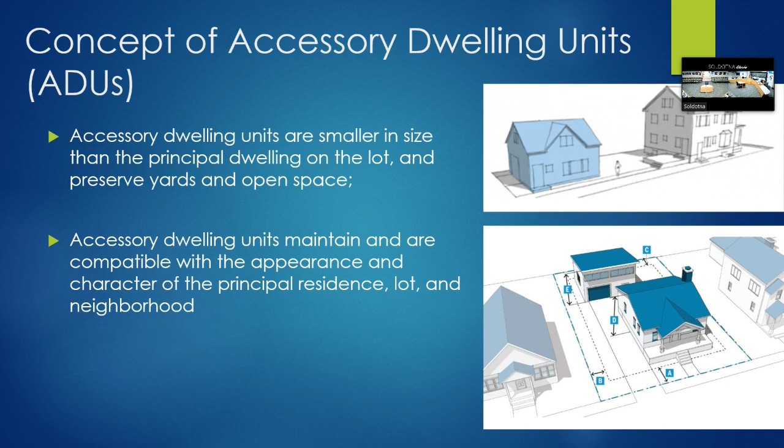Purpose and intent. These are the basic reasons why we think we should be allowing ADUs in Soldotna. The first one is that it allows more efficient use of our existing residential zone land, our housing stock, our existing infrastructure. If we can hook another unit into our already existing sewer and water, that's a plus for everybody. It allows us to respond to changing family and community demographics.

So if we've got parents that want to age at home, we can provide a space for that. We can provide a space for our kids. We can provide a space for the single person that moves up to Alaska that's never been here before, and they've got their place of their own rather than perhaps an apartment. It provides a broader range of accessible and more affordable housing within the city. So hopefully this will increase the...

Can you check, Jen? Someone's at the front, thanks. I thought her—okay, oh, it's okay, thank you. Post office delivering late.

So we talked about affordability a little bit, and then last, protect neighborhood stability, property values, single-family residential appearance. So those are the reasons that a lot of folks are adopting these codes and the intent behind them.

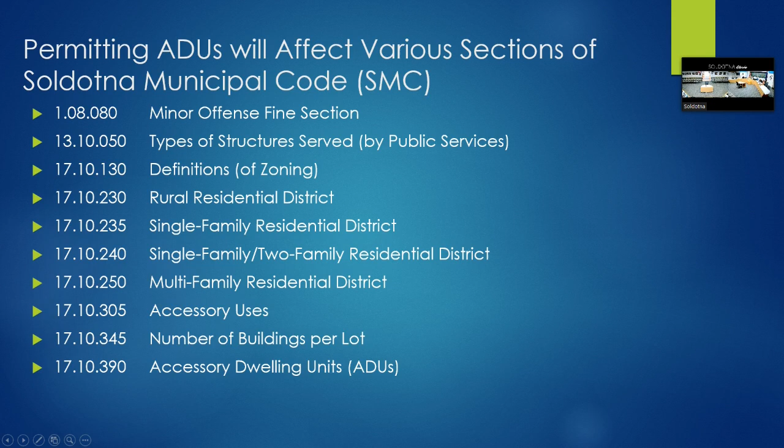So the definition—what is an accessory dwelling unit? It's a subordinate detached dwelling unit which provides basic requirements for living, sleeping, cooking, and sanitation, added to a lot or parcel with an existing residence.

We'll get to that here in just a little bit, but generally duplexes are allowed in most residential zoning districts in the city. There's only one, the single family zoning district, where duplexes are not allowed. What about if they converted their garage? If the garage was attached, it would be considered a duplex. If it was detached, we would consider it an accessory dwelling unit.

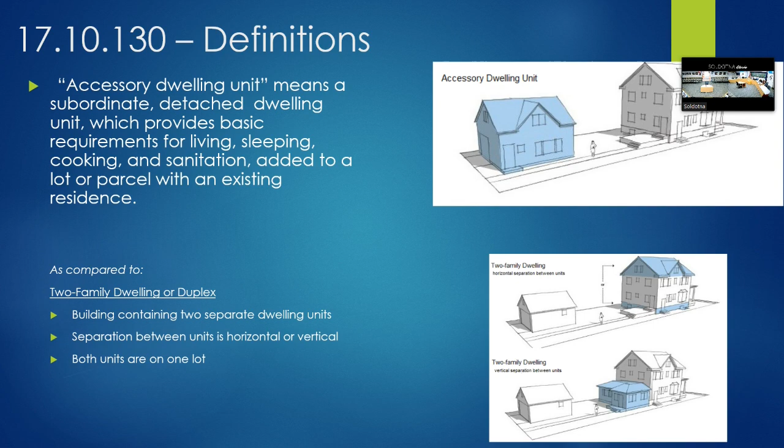So we'll start with the single-family residential district. As Jen pointed out on the map, the single-family residential district is tiny. It's the smallest zoning district in the city, and it only affects about 15, maybe 20 parcels.

The rest of the city is zoned, for residential anyway, as single-family, two-family, rural residential, or multifamily residential.

What I've left out is A, B, and C, which are the principally permitted uses and the conditional uses, and one other section, general standards. So we're only talking now about the accessory uses and structures section.

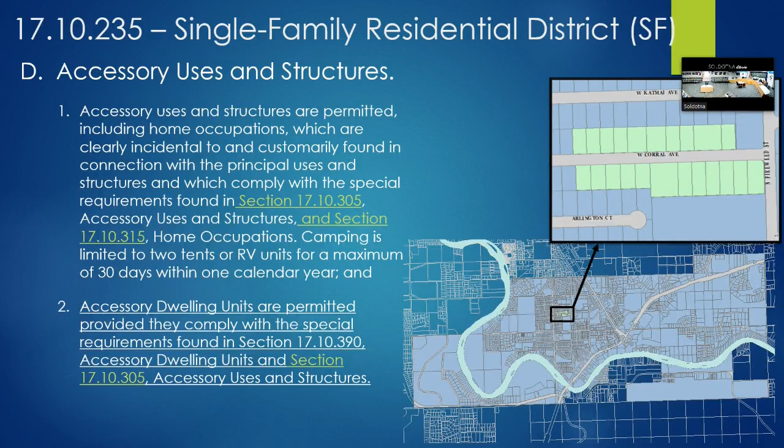It's saying accessory dwelling units are permitted provided they comply with the new section 390. The other thing I'll point out here, in both the single-family and single-family, two-family districts, is this right here: camping is limited.

Camping is limited to 2 tents or RV units, not to exceed 30 days. I call that to your attention because we're going to come to one district here that does not have that, and that is one of our suggested changes - to add that in.

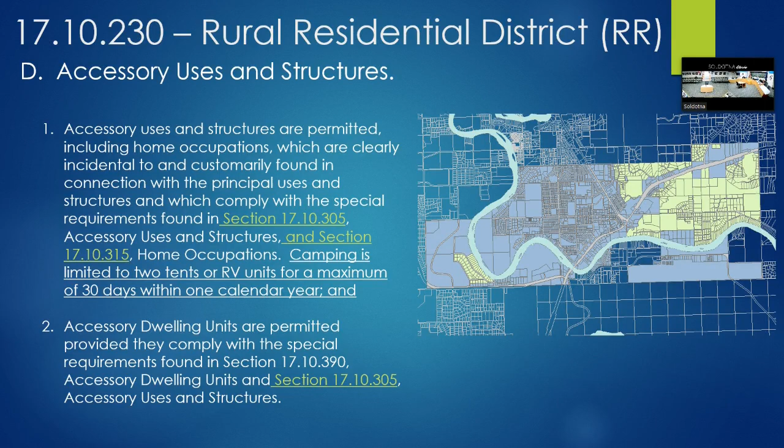You can collect rent if you want to. It's basically taking out an old section of code that, as far as we know, has never been utilized.

We have in our general standards height standards for all buildings in the zoning district, so we feel this additional language in the accessory use section isn't necessary.

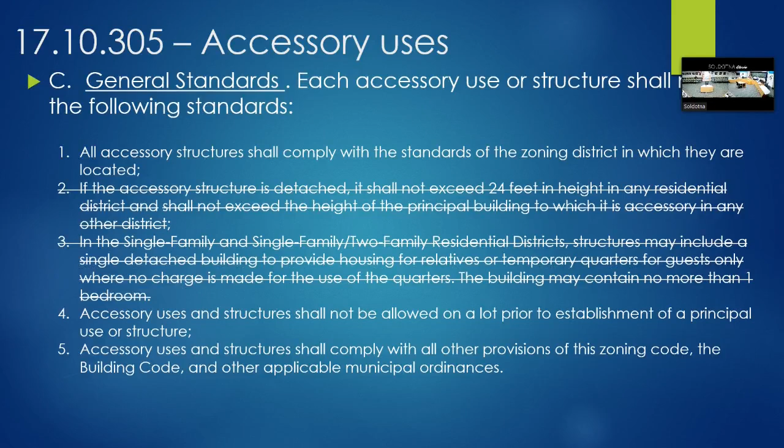Yeah, but if there's like a block with a bunch of them, then if it blocks the sun... I remember being in Chicago, how all those buildings are so tall and there's no sun anywhere. I'd hate for that to happen in my backyard. Okay, I appreciate that.

And they can rent them out? Is that what... Yep, and we'll get to that in just a little bit. That's in section 390, all the standards for accessory dwelling units.

Right now, we just finished up the zoning districts, and now this is another housekeeping item: number of buildings per lot. What this does is it adds the rural residential zoning district to the list of zoning districts where we allow only one principal building per lot, unless, of course, it's an ADU authorized by the code.

And the reason this is being modified is because we had an instance not too long ago where a developer had a 19-acre piece of property in the rural residential zoning district. Under the existing code, he could put up to 19 buildings on that lot without having to submit a site plan or go through the subdivision process. So we had virtually no oversight, no control over the placement of buildings, whether they provided fire protections, health and safety as the building code requires, or things like access to and from roads.

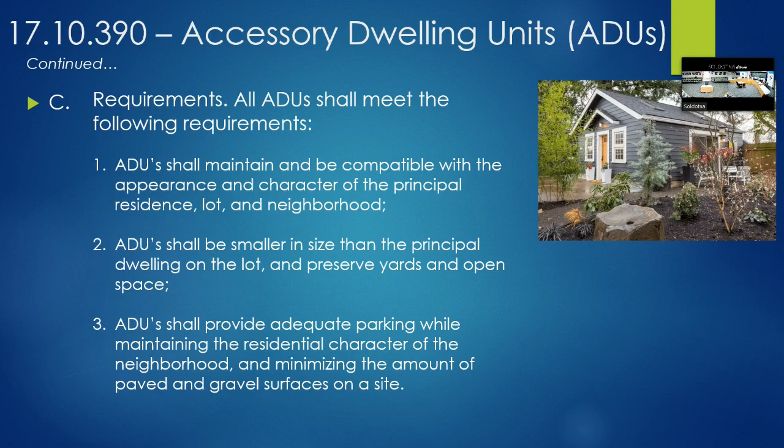So, general standards: the following general standards apply as requirements for the permitting and operation of an ADU. There's a bunch of them, I believe 15 different standards that apply, and we'll go through these one at a time. The first one is that accessory dwelling units may be permitted within the single-family, two-family, rural residential, and multifamily districts. Those are the ones we already went through, where we added additional language to specifically allow them as accessory uses.

Number 2: accessory dwelling units are not permitted on lots having an existing two-family principal use within the single-family, two-family zoning district. The intent is that if you've already got a duplex in the two-family district, a third unit wouldn't be appropriate, because it's no longer single-family, two-family — essentially we've got 3 families, it's becoming multifamily. So if you've got a single family, which most are in the single-family, two-family district, there aren't that many duplexes, most are single family, so this would affect a relatively small number of lots within the city.

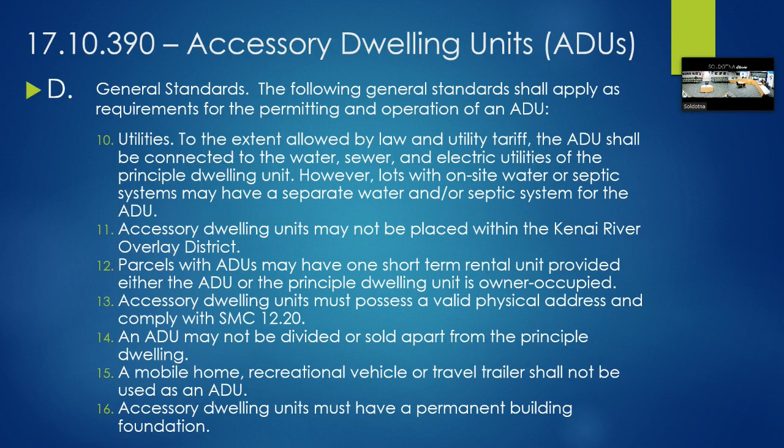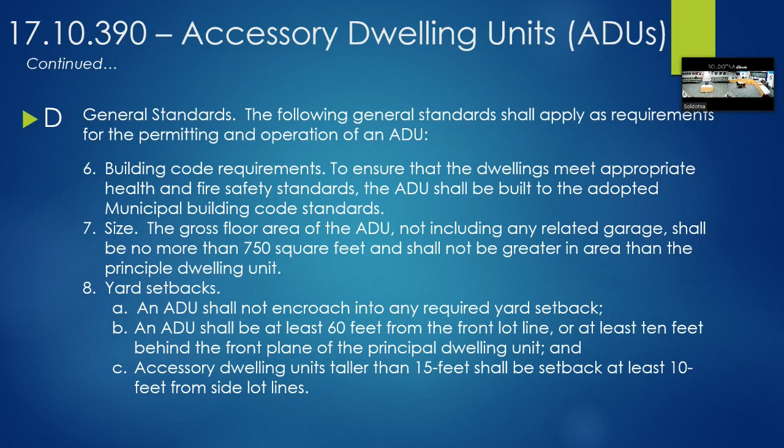What constitutes an unlawful use? It would be something in violation of the general standards—I'm looking for a good example. It could be the owner-occupied short-term rental issue, or parking on the lawn. The owner-occupied one is probably the big one—if they're not living there and renting both units out as short-term rentals, that's where the fine would be appropriate.

Or using it for a business—if they were using it as a business, they'd probably be fined for a violation of the zoning code rather than the short-term rental code, because businesses generally aren't allowed in that zoning district unless it's a home occupation, like a salon, an accountant, or a daycare. A small sewing business you're allowed to do in your home would also be allowed within an ADU if you're living there and renting it.

But if, for example, the homeowner was fixing cars in the driveway, that's a home occupation that isn't allowed, and that would be a violation of the zoning code—they would potentially get a letter from us for that.

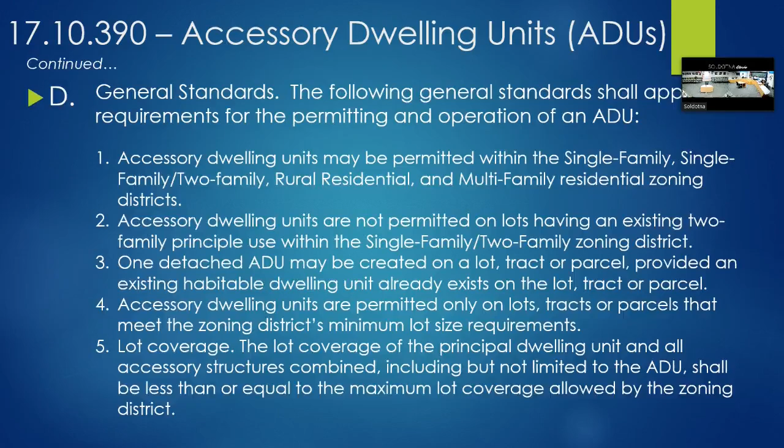Okay, so here we are now talking about utilities. The first couple slides deal with water lines.

The underline again is the new text. It says a separate sewer service connection shall be provided for each separate residential or commercial structure, except for accessory dwelling units approved under SMC 17.10.390. Also, intertying is allowed for accessory dwelling units.

Our utility manager is also looking to create language allowing for a waiver in unique circumstances. The example he gave is someone wanting to put a sink in their garage so they can wash up after gardening or working on the car, rather than in the house. He wants an exception to allow these unique circumstances where they can connect back into the main line of the house rather than running another line off the main. That's something we don't have yet; it's currently all with the attorneys getting reviewed.

It's just a garden hose. Garden hose works too, yeah, with a connection, of course. Right.

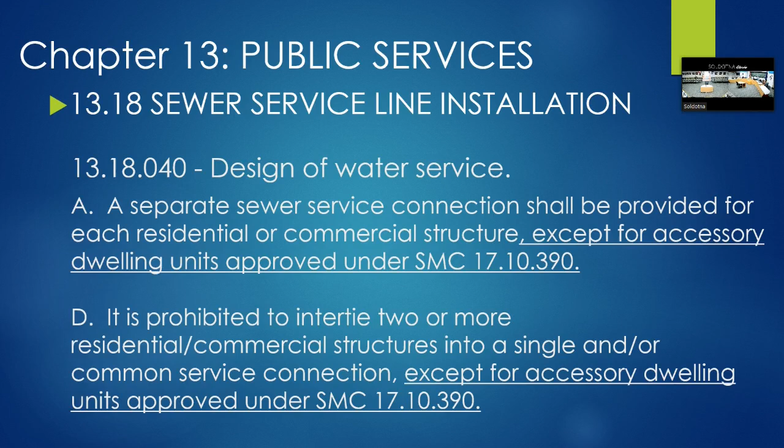And that is all we've got on accessory dwelling units.

This is an informal conversation, so if you'd like to make any comments, Peggy, feel free to come forward. It's nice to turn the mic on so it becomes part of the meeting. But we don't have to do anything formal. Does she need to state her name? I know who she is. No, yeah.

I'm sorry, I got the ball rolling here. You've done a lot of work on this, and you may have already been considering this usage, but I have now moved in with my mother into the 1963 house that arrived on a big truck and was constructed. I'm thinking that it is about 800 square feet, and I should do a better job of measuring.

And the property that that little house is on, it's a lot that's 282 feet long and 162 feet deep on the Kenai River.

They didn't meet the 60 feet, they did not. Or they're 10 feet behind the other house, which is an either-or requirement.

Well, they didn't leave much green space in there. Thank you, Peggy. Thanks for all your work on this.

If you have specific questions, you can contact Jen or I, and we'd be happy to chat with you. Nothing's set in stone at this point, and we can look at yours as an example and see how it would fit and how it would work, see how we could apply these kinds of standards. It's always good to have examples like that, and the architect might have ideas too.

Okay, thank you very much. You bet, yeah.

Is there a requirement that the accessory dwelling can only have one bedroom? There's not. Okay, I don't know where I came up with that. Some municipalities do limit the number of bedrooms. Okay, and bathrooms, I was going to suggest eliminating that if we - I thought that I heard that somewhere, so.

Is Kenai doing this? I don't know whether Kenai is. I'm not sure whether they've got standards already adopted or if they're thinking about it, but it's something that Anchorage went through about 4 or 5 years ago. In fact, some of our graphics are stolen from Anchorage.